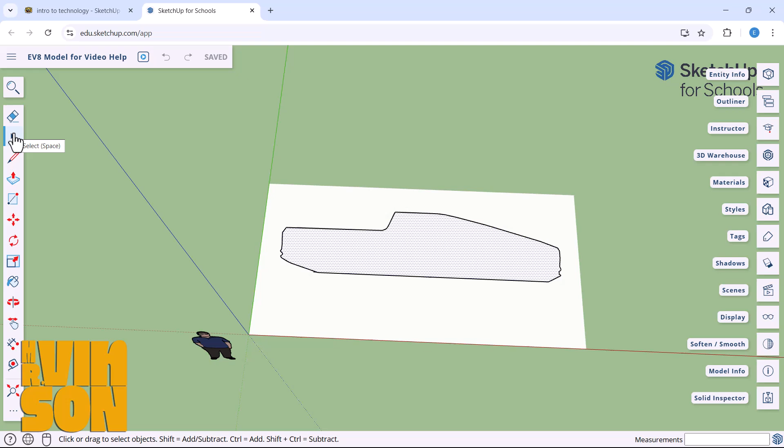And I'm going to click that with the arrow, the select, or press space, and I'm going to press delete to get rid of my filled in car. Now, it's not anything to panic about. If you ever want it back, all you would have to do is draw a line across the image and you would have it back.

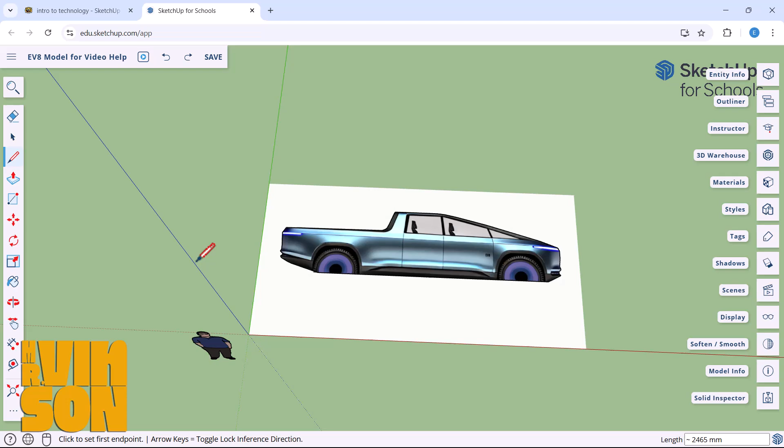But right now, what we're gonna look at is some of the details of the car. And the EV8 is a marvel of engineering. It is fantastic. And so, it needs to have a way to get in, because what's a car without a door? And so what I'm going to do is draw some lines to represent my door. And then I'm going to tell you something really important about 3D printing lines.

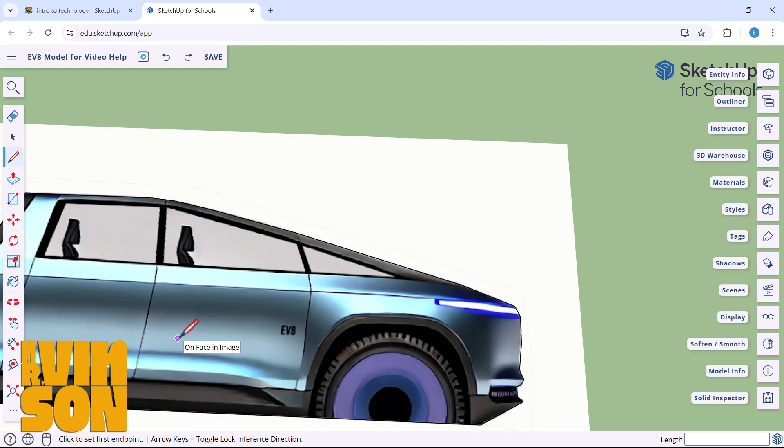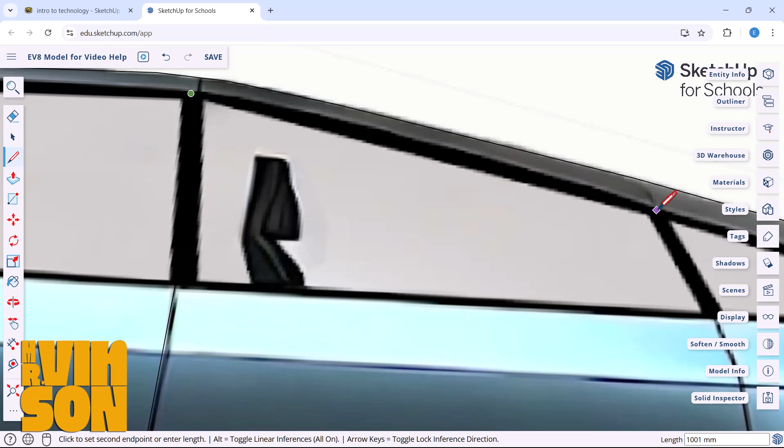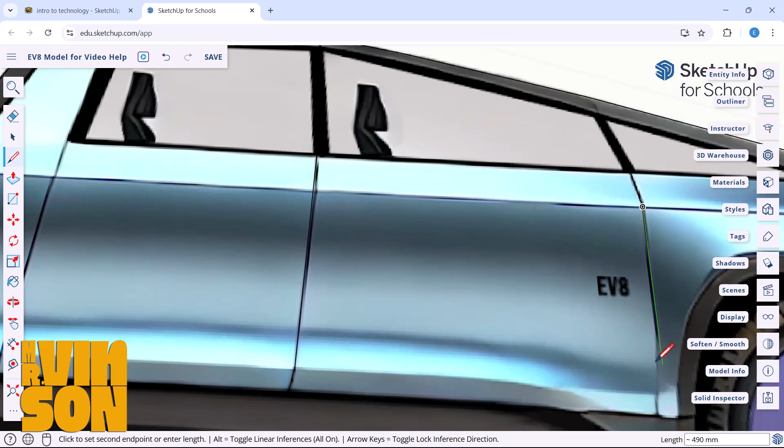Now, you can see in the car, it actually sort of starts here. Follow along the best that you would like to. This is, of course, a car that does not exist in real life. And so if you would like to change the shape of the doors, you are welcome to do that. Now, what I'm going to do is outline kind of the entirety of the door and then show you a tool inside SketchUp that's going to allow us to make something that we can actually 3D print from this, that we can see the detail, okay?

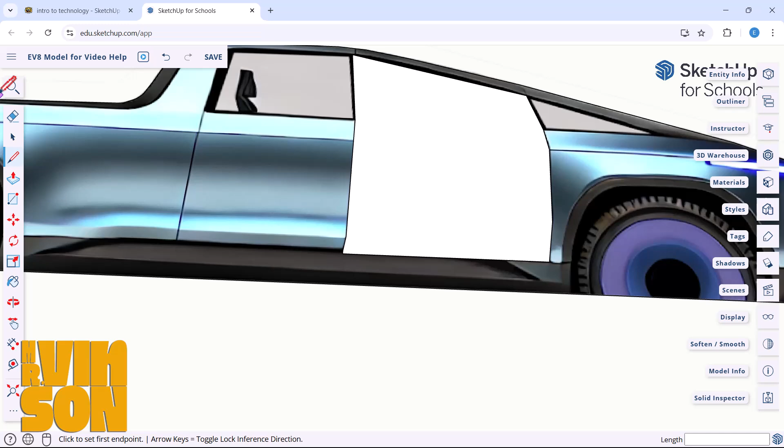So I'm almost done here. I'm gonna go down to the bottom, straight over. I'll just go on the red line, fill it in. Okay, now we've got what could be considered a door. And there are lines in this drawing, but they will not 3D print. And the reason is because if you look at this image from a flat view, there's nothing there. It's all flat. And we're going to be adding some depth, some dimension to this. So follow along with me.

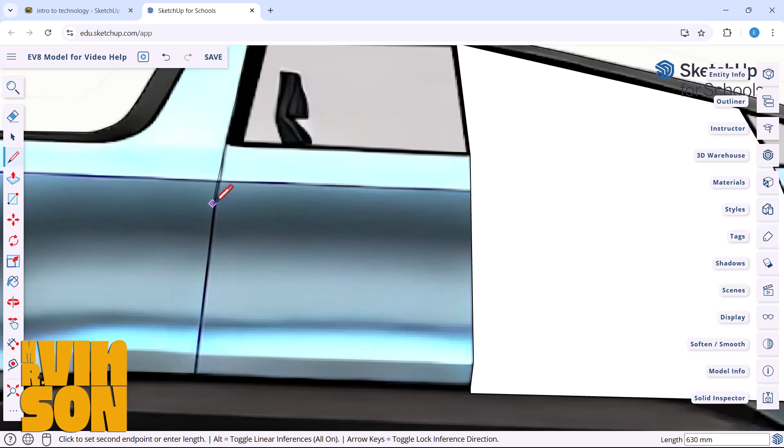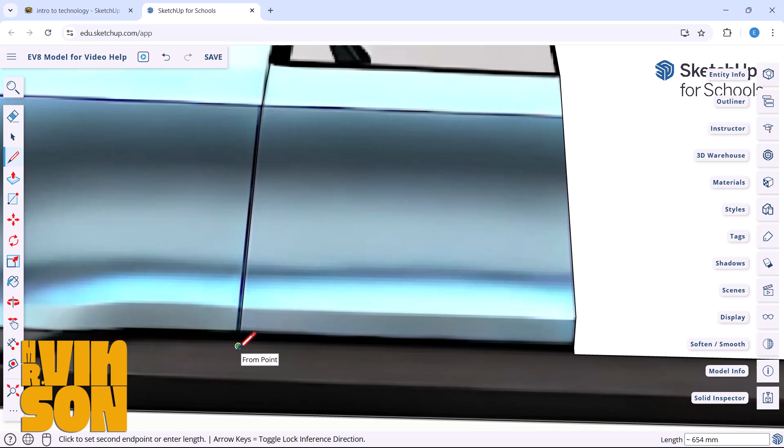Okay, so I've got a door. Now might be a good time to just, maybe for fun, add the other door so you can better see what I'm going to be showing you next. I'm gonna come in kind of like down to this neighborhood. And when I get close, the green line and the red line actually mean something. So that green line right there actually is telling me that that line is parallel with our green axis. And the same thing with the red line. So I know that line's straight. So I'm going to just click there and then go over. And now when I zoom out, I've got two doors.

Now there's nothing there again to 3D print. And so what I'm going to do next is use a tool called offset. And it's right here, offset. Because what I'm going to need to end up doing is creating something that I can add a little bit of depth. I can add that gap that the door would have. So I'm gonna click and not hold. I don't click and hold anywhere in SketchUp. I recommend you don't either.

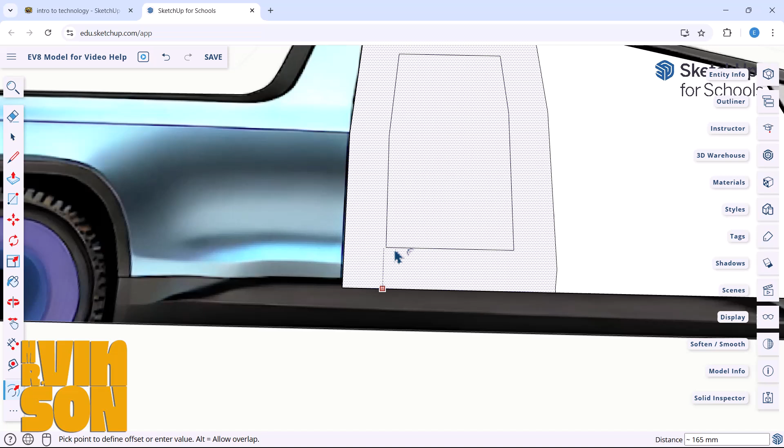And then you can see we can create a different span of our gap. And I'm not looking for a big gap in the door. This is a modern car. So on mine, you can see that's about where I want it. Down right underneath me here, it says about 7 millimeters. I'm going to actually type in 5 mm and press enter. And the only reason I'm doing that is then I know exactly how big that gap is.

I'm going to do the same thing with the other door. I'm going to click, drag it in, and I'm going to type in 5 mm on that other door. And it might not look like I did anything, but I did.

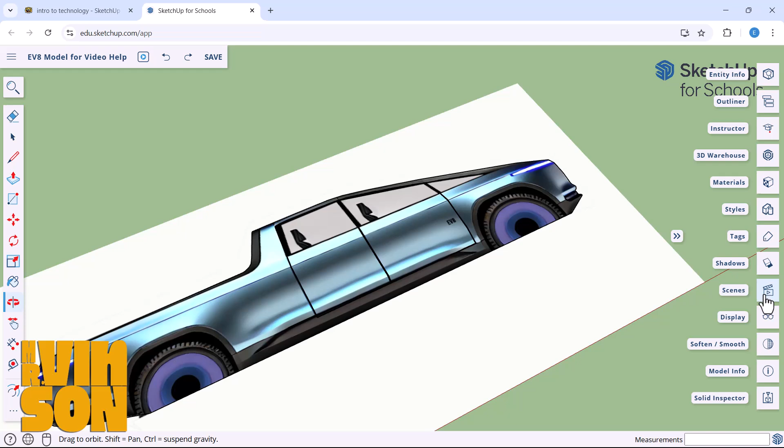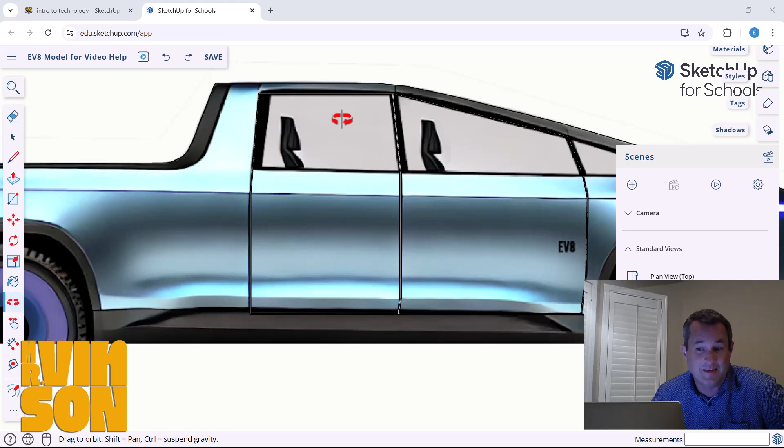If you ever find yourself lost, maybe in a confusing orientation of the picture, what I recommend you do is click Scenes over on the right and go to Standard Views. You've actually got some options here that are going to make it easy for you to find your work. And in this case, a plan view top is a great option. Now, what I'm going to then do for the next few minutes is go and outline some of the key details of this vehicle.

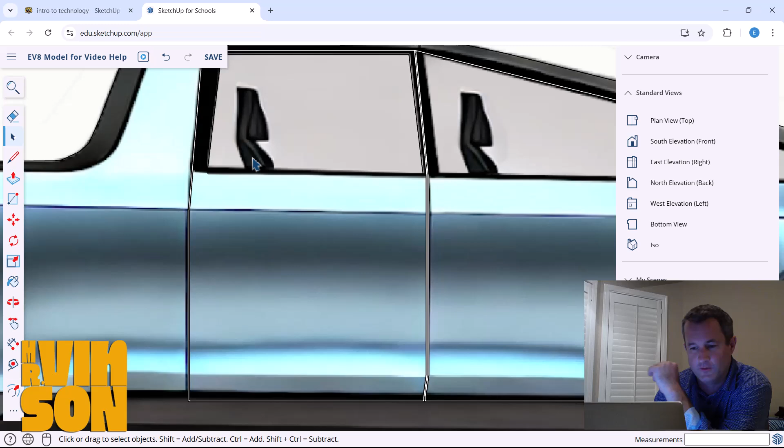You'll notice that once you get an item highlighted, it's going to turn solid, and we actually want that. This means that that piece is correctly outlined. And so I'm going to delete it for the moment. The headrest is not going to need to be a detail that we're going to push-pull, so we're not going to worry about the headrest at this time.

Again, offset. All these pieces need to have some sort of 3 dimensions to them. So I'm going to put this piece back, use that offset tool, and actually push it in that same 5 millimeters to give me that nice even window look. Can do the same thing for the other window on this side.

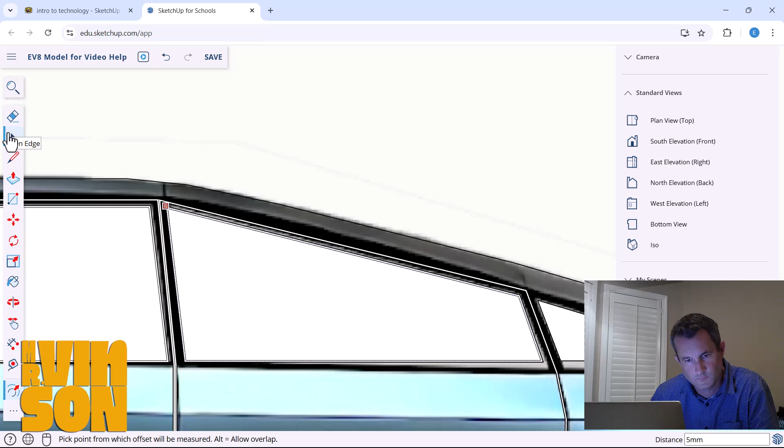So what I'd like you to do for the next little bit of time is follow along these details. Get the light, get the wheel well. We're ignoring the wheel itself for now because what we're actually going to end up with is separate 3D printed wheels. If we did it right now, we would actually have trouble later. So keep outlining, keep working on these little details, and I'll catch up with you in the next video.

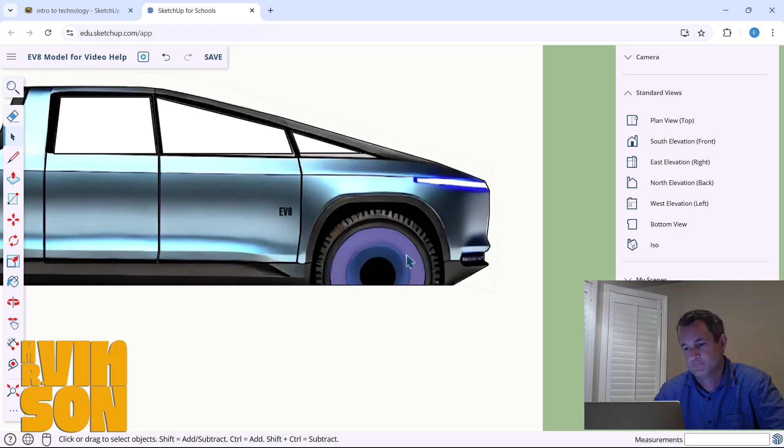One thing I do want to point out when you go to use the circle tool is you can see right below my picture right here that it has a number of sides, and it's kind of a misnomer because obviously we know circles don't have sides, but it's the way SketchUp draws that shape. And so right now, in order to get a nice smooth circle for the arch of this wheel well, what I'm actually going to do is type in a number greater than 24.

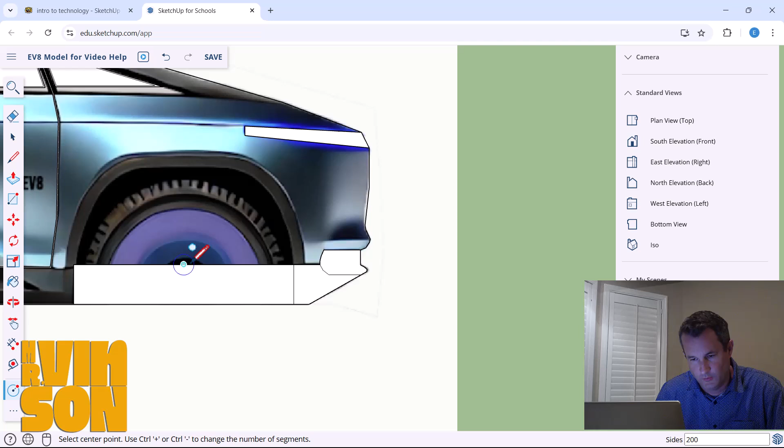I like 200 actually. And what I'm going to then do here is from the center, I'm going to use that spot to create the shape of my wheel well, okay? And this is going to be one that we're going to use later. And so I want to have that shape of my wheel to be consistent. So I'm going to get rid of that part right there. And this is going to create an exact circle shape for this particular piece here.

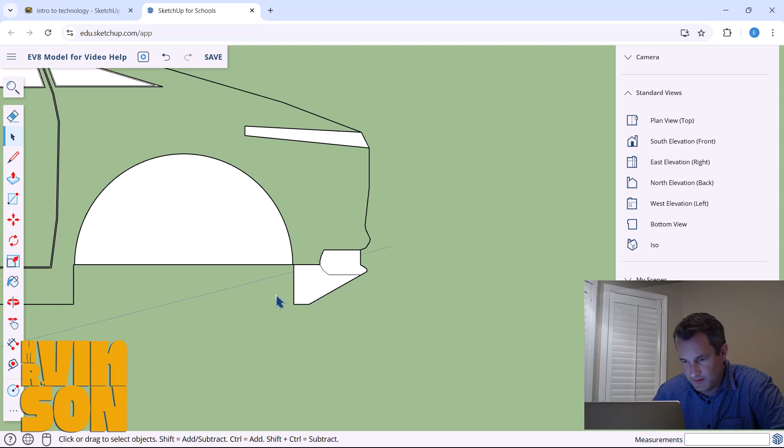So again, the way in which you go and do this is up to you, but that shape is kind of what I'm going for here. And so I've got this one here that I like. I actually can take and use the arrow, this one right up here, the select tool, and I can copy. I'm going to unselect everything that I don't want.

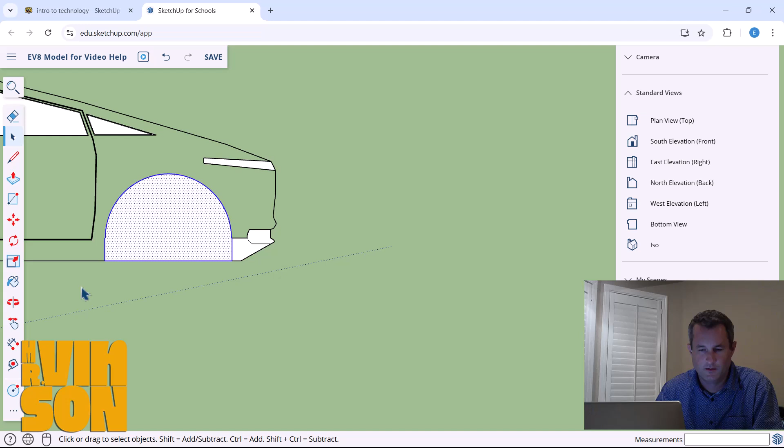I'm going to copy it, Control C, because I'm going to just use that same shape in the back. And so I'm going to paste, Control V, put it where I would like that back wheel well, which for me is going to be in that neighborhood, going in and continuing to work on this.

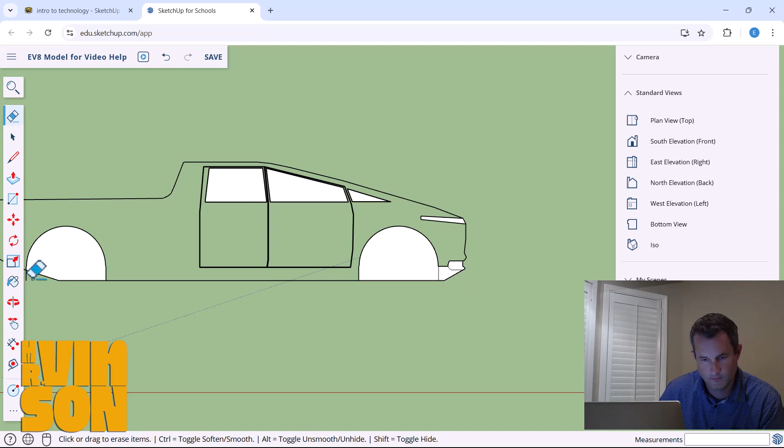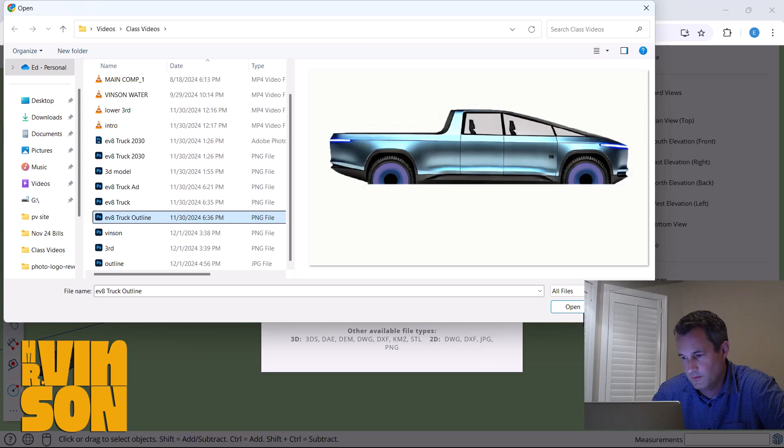Now, I do want to point out I accidentally deleted my picture of the EV8. How embarrassing. What I'm going to do is put it back in, File, Import from my device, and find the picture where I had saved it. And because I started out in the origin, I can put it where it was. Maybe I didn't start out in the origin.

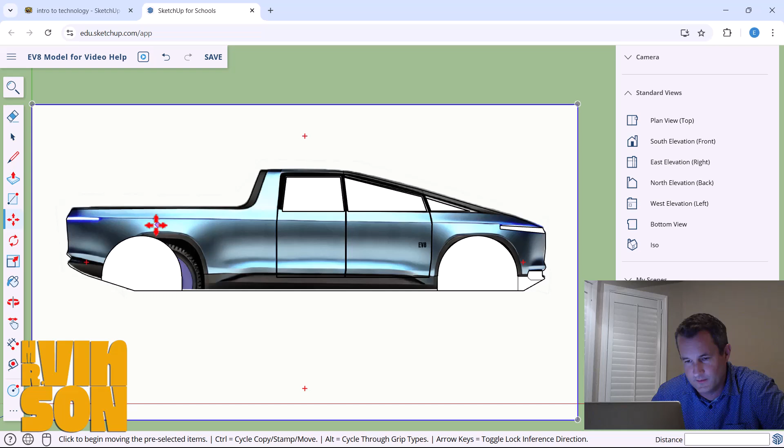What a bad example. I can put it where it was, and I can move it down, get it basically lined up where it was, so I can continue to have some basis to go on for the remainder of my design.

All right, thanks for watching. As a reminder, this is about where you should be at the end of this step.

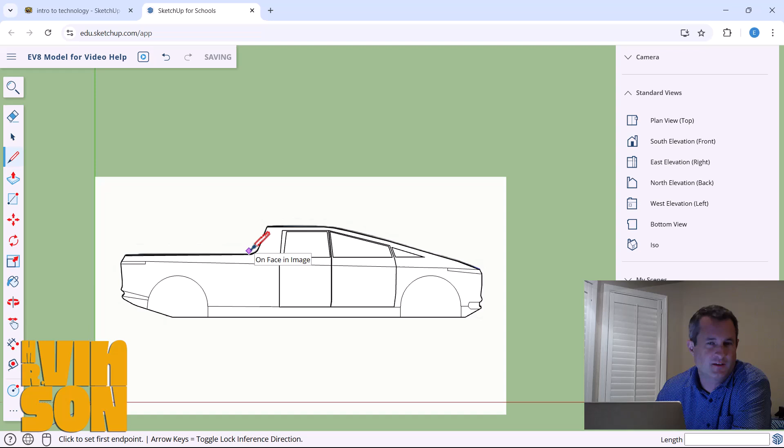And if you do have questions, tag the problem, try it yourself, acquire knowledge. And if all else fails, get up and go get help.